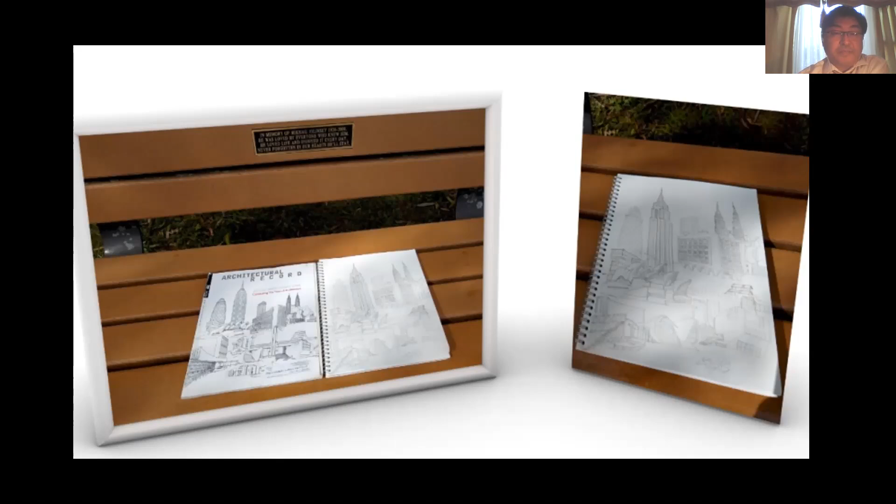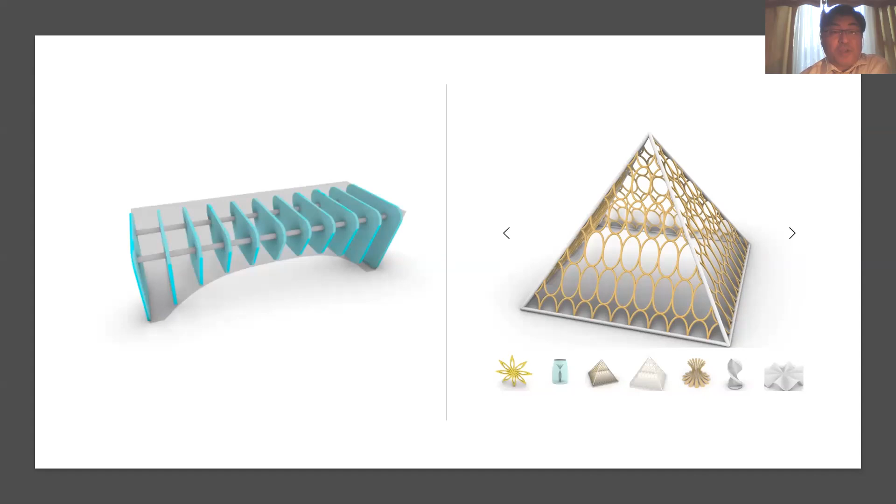So I sat down on a bench and started to make a sketch of the buildings. As you know, the sketch is a universal language to help visualize inspiration and motivation. The sketch I made eventually ignited my imagination and helped me learn digital technology tools, and I was able to transform the sketches into digital parametric models. I realized again, creativity comes in various ways when we view the object from diverse angles.

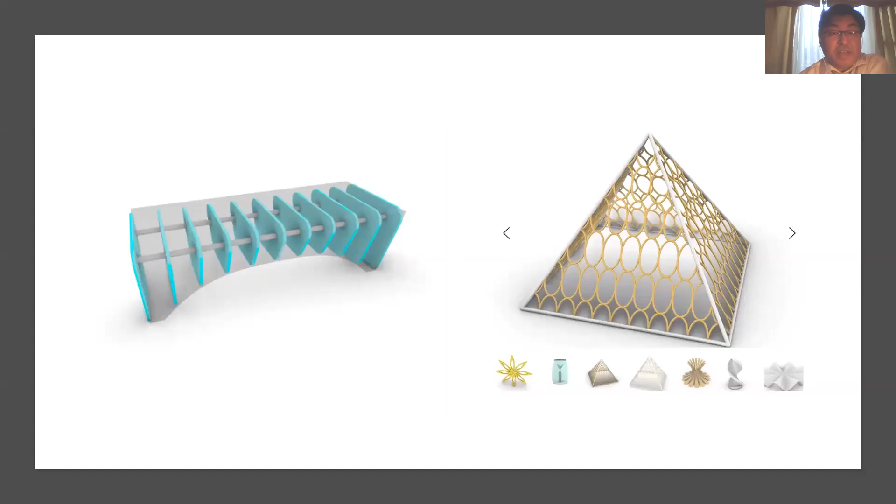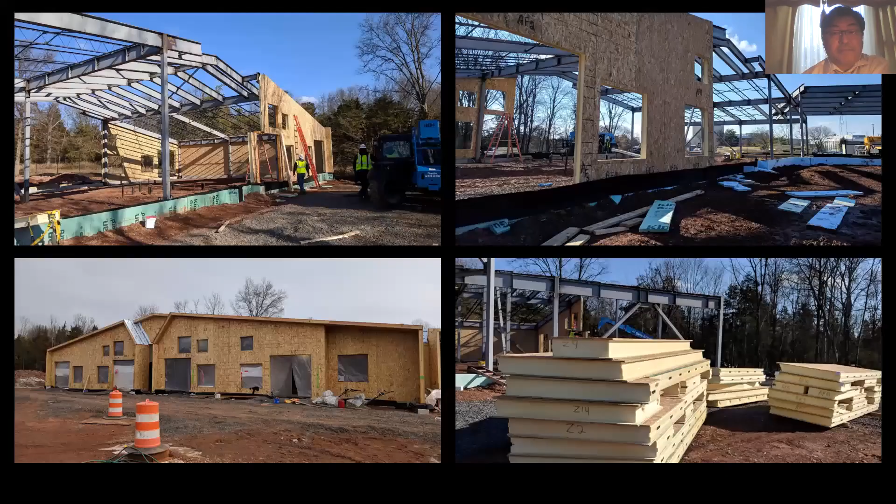To make our world a better place, engineers have contributed in various ways. Global warming is real and everywhere, as you know. How can we engineers contribute to the world? We have been developing construction materials and elements to preserve energy. How do we improve energy efficiency? That is a big issue and challenge.

Structural elements like wall and roof, as you can see in the photos, can be made of structural insulated panels, which introduce a high R value. Structural insulated panels can save a lot of energy, especially during the summer and winter time.

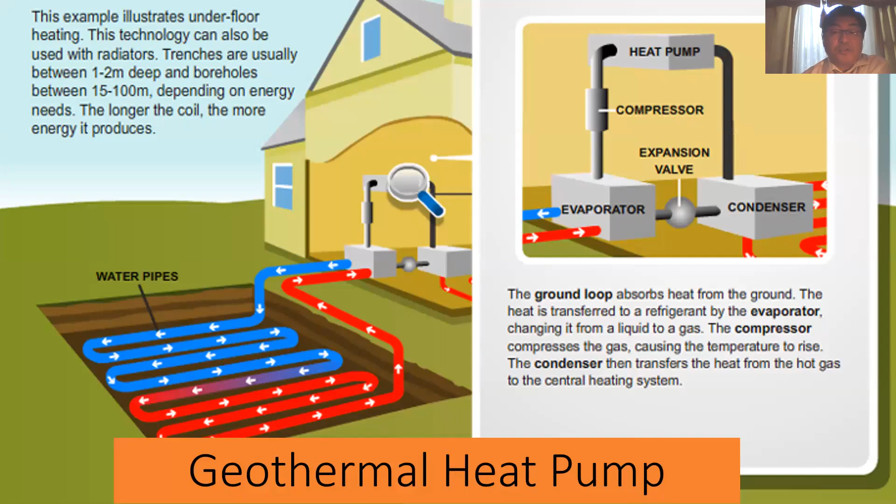An engineer also developed the ground source heat pump system. The system absorbs heat from the ground. We call it geothermal heating, another energy source that controls the temperature of your house for heating and cooling.

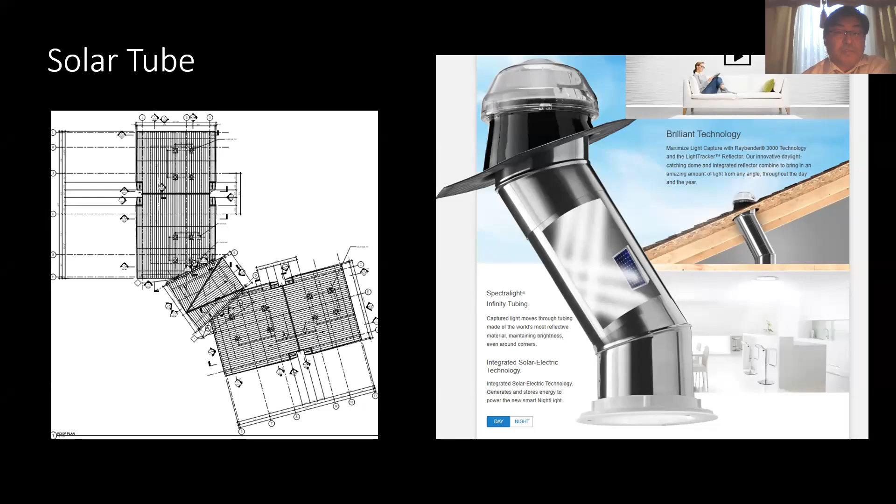For bright and healthy indoor environments, we can also bring natural light to our indoor space. Engineers came up with an idea of how to bring natural light from the roof, as you can see in the image on the right.

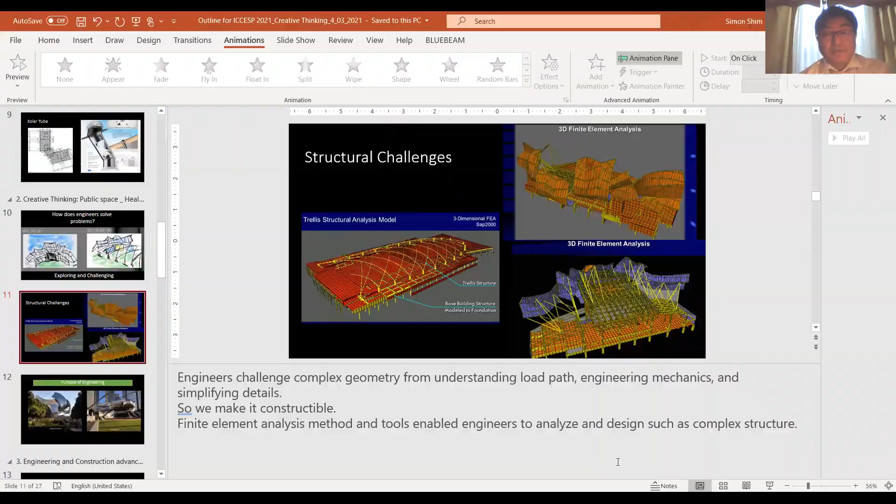Then how do engineers solve these problems? Often we ask and reframe the questions, and we explore and challenge the problems—open geometry. Often geometry is the biggest challenge, as you can see, the engineers challenge complex geometry just from understanding load paths and engineering mechanics and simplifying details.

So we make it constructible. In the structural engineering field, we use finite element analysis methods and tools. It enables us to analyze and design such complex structures.

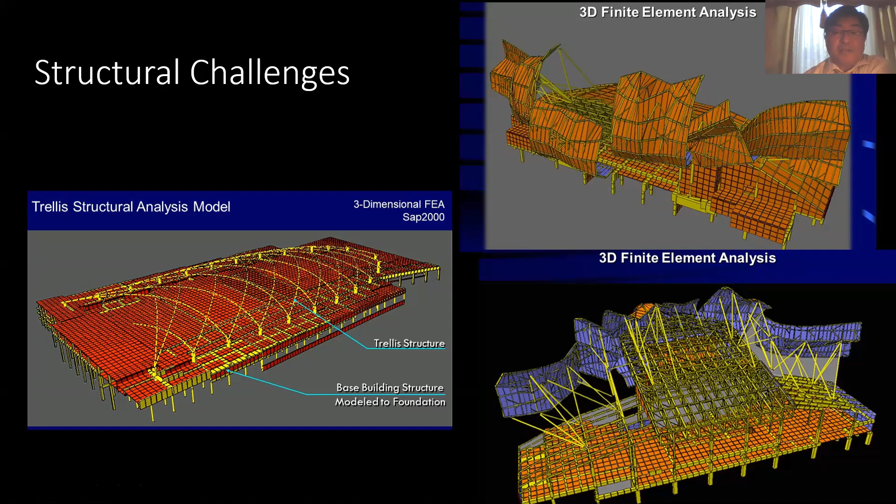So what are the benefits eventually for all these challenges? I think the benefit would be a joyful gathering space and public health. I believe this is the purpose of engineering. The image you've been seeing so far is the Millennium Park in Chicago. For those who attended UKC 2019, I think some of you might have had the chance to visit the Millennium Park, I believe.

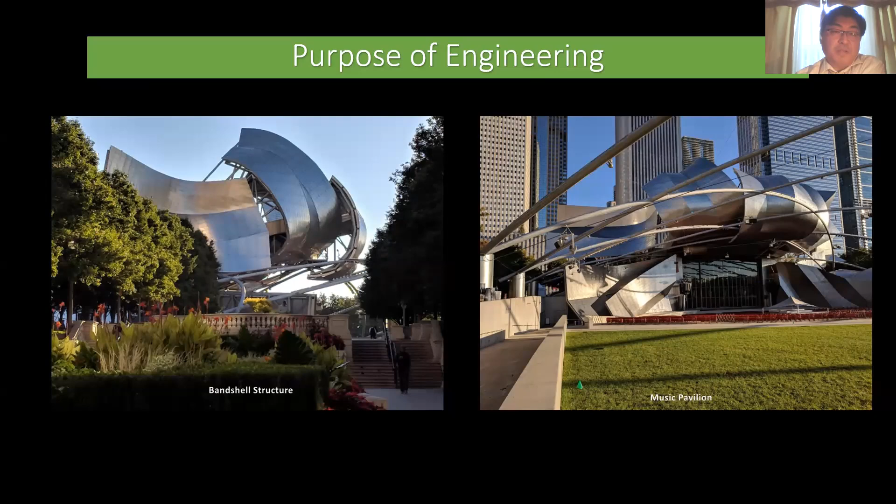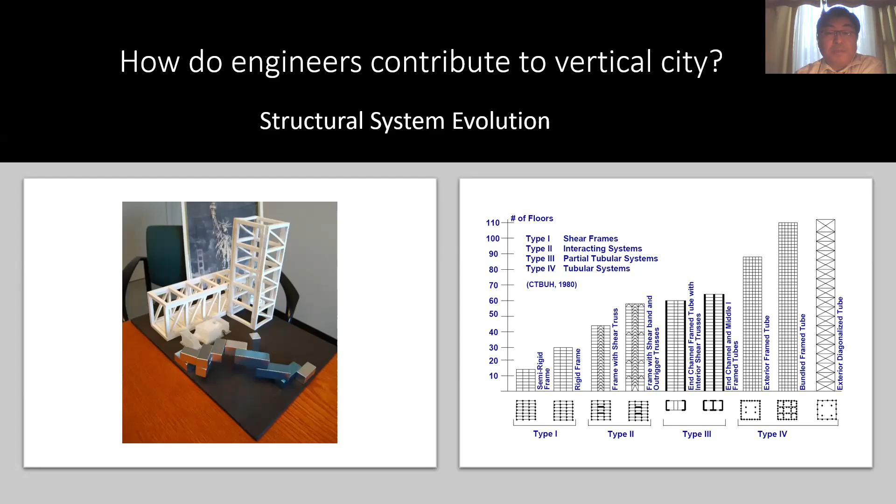How do engineers contribute to the vertical city? Thinking about the vertical city, it has been made through structural system evolutions, from semi-rigid frame to mega diagonal tube system. The structural system has been developed along with fundamental engineering, material and construction technology advancements. Yes, engineers have been able to design even 1 kilometer tall towers.

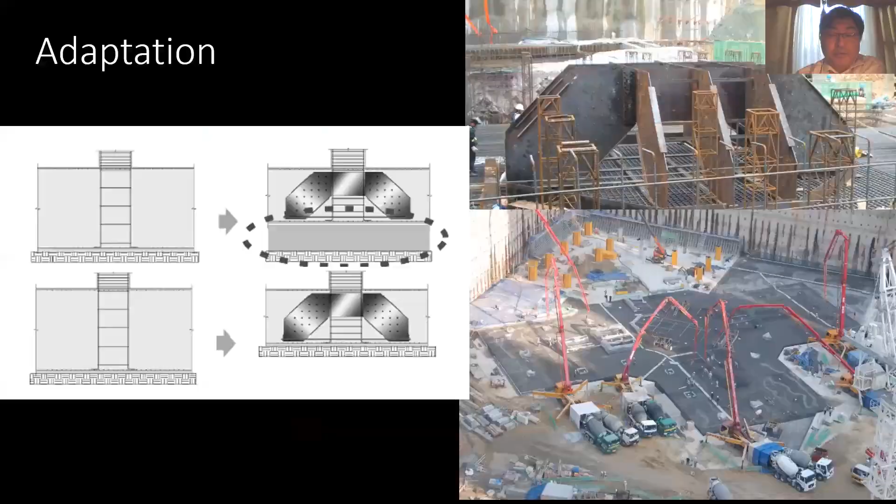How about concrete? Concrete buildings are also going higher and higher thanks to high strength concrete and admixture technologies. Concrete structure reaches even close to steel strength. Nowadays, 14 KSI concrete strength is commonly used in high-rise construction in New York City.

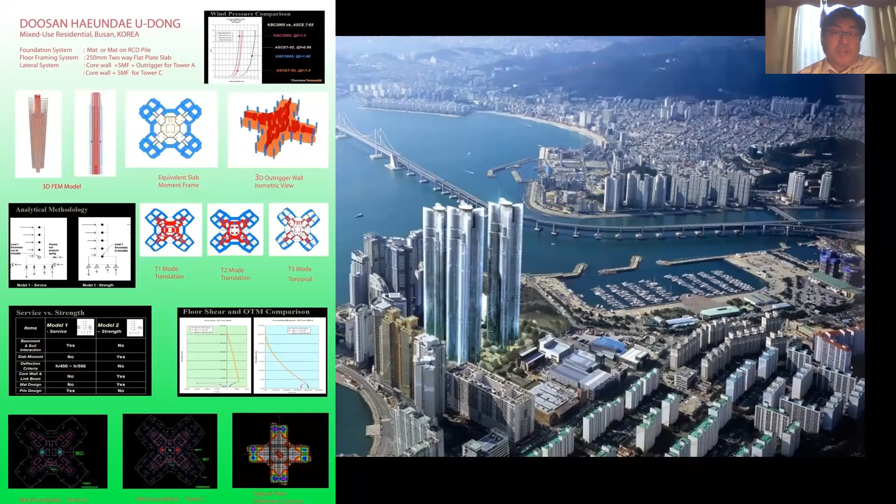Engineers often borrow theoretical ideas and apply them to other elements. For mat foundations, engineers use the strut-and-tie method, which is able to reduce material and mat thickness. As a result, overall concrete volume and mat construction time can be saved substantially.

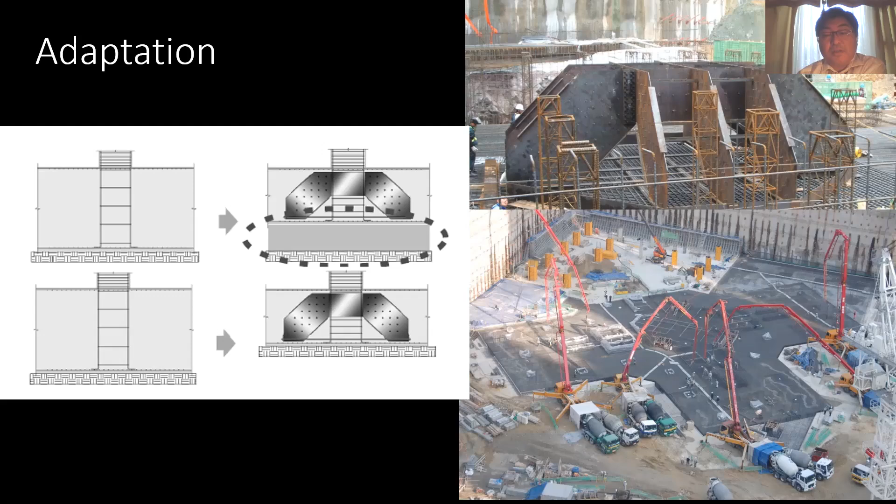So far we've talked about new buildings and new constructions. Now let's think about existing buildings. Most buildings in cities in the USA have been constructed in the early 1900s.

This is a 6-story warehouse and terminal facility built in the early 1900s in New York City. Unusually, this building has a train platform on the second floor, so freight trains came into the second floor level. So it had to be designed and constructed very heavily.

Time passed and the city transformed, eventually requiring modern office space. So the warehouse building had to be transformed and converted into a Class A office building.

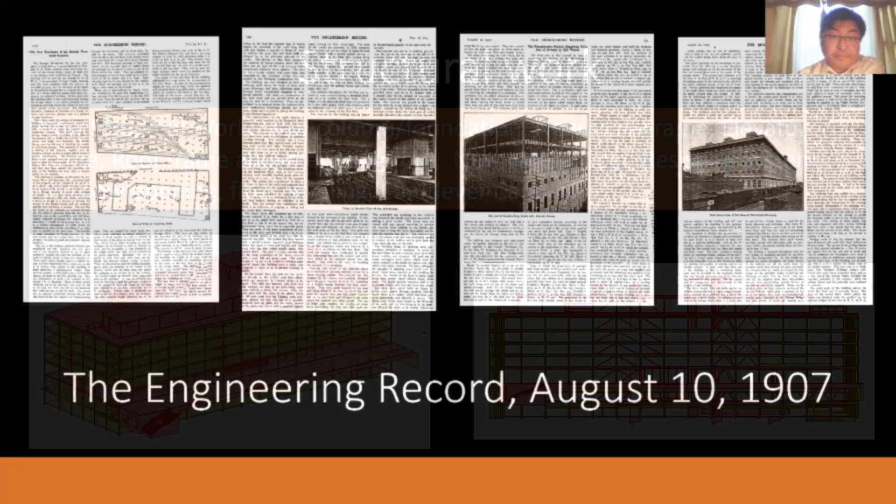So often the engineer has to cut existing columns to accommodate the current office space layout, adding new columns and reframing the floors, and also reinforcing columns and foundations.

Recently, humans succeeded in landing a new mission, Perseverance, on Mars. So exciting! I'm really looking forward to seeing its progress. But what does it mean to engineers? Can we imagine humans building a habitat and living on Mars?

What I'm sure of is that we need a lot of creative engineers. Now, from the big scale to the small scale, engineering, construction, and design technologies—the future will be more dynamic.

Thanks to the DNA of humans and technology, engineers can do a better job. Future is now. The design industry has adopted digital technologies, from digital design tools and engineering software to manufacturing tools and machines. When we imagine something, literally, we can create it. Creativity helps us move forward.

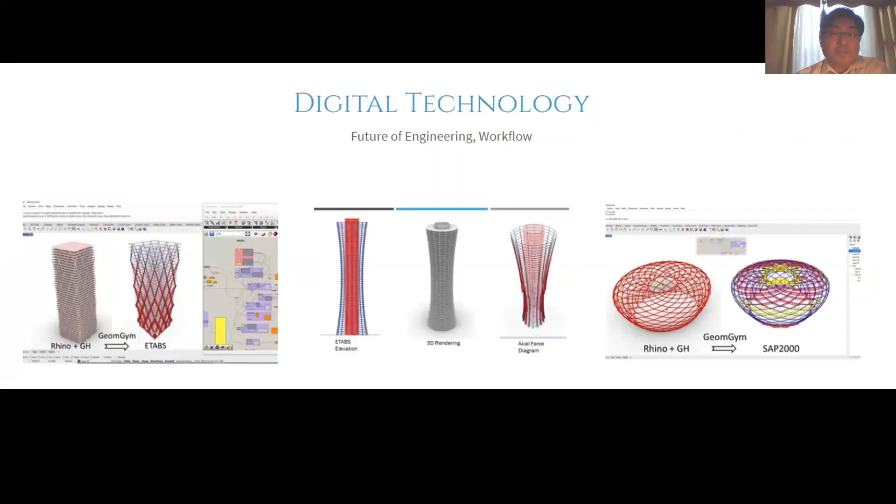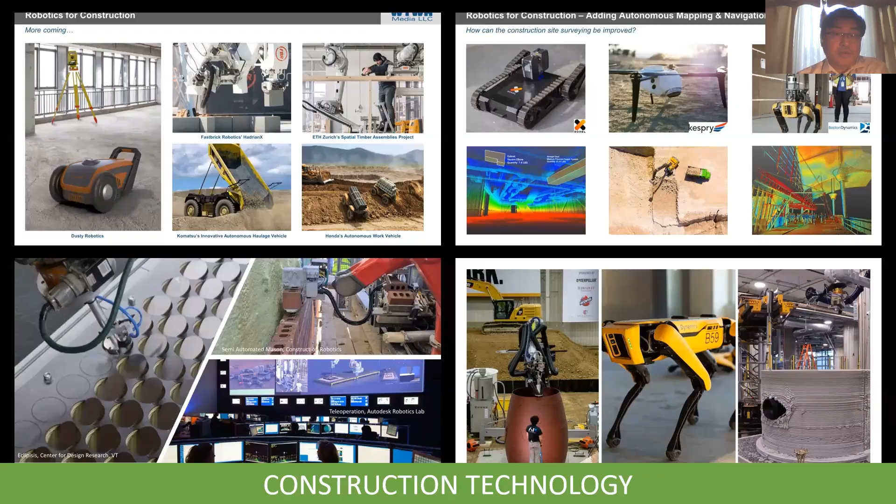Construction technology is also moving forward very dramatically. Machines are getting smarter and freeing up human workforce from mundane and hazardous work. In the near future, artificial intelligence will take over many current jobs. As engineers, we should prepare for the future.

So I think let's use our imagination. I believe we can be more creative. To be creative, we should be open-minded, right? We can be artists and designers as well.

Engineers are in a leading role that makes all of this possible. So let's rethink engineering and science, which will give us new opportunities. I think creativity gives us new opportunities.